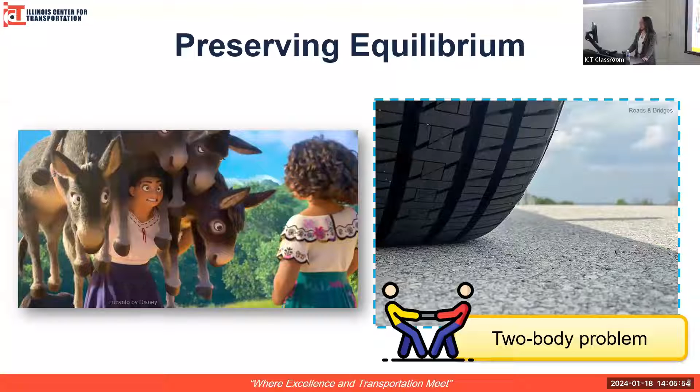The modeling framework, similar to when we train or even do equations, there's an input side, a black box of equations that you plug and chug, and then there's the output that you expect to learn more about going through that framework.

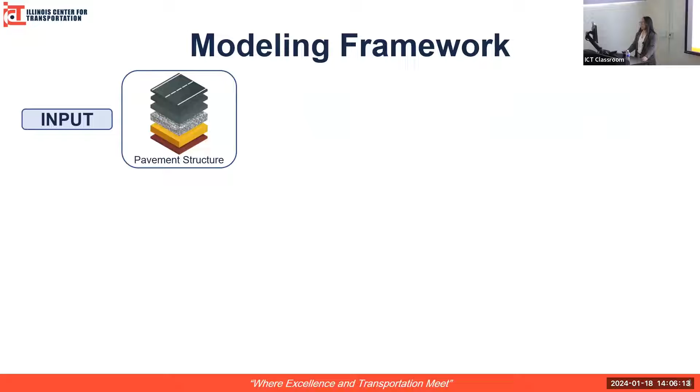In this two-body problem, the pavement structure, configuration, thicknesses, and composition is one of the inputs. The associated material properties for each layer matter because how that behaves depends on the material being subjected to, and how it's being impacted by the environment, whether it's a combination or singular individual contribution from temperature, or even inundation or flooding for moisture damage.

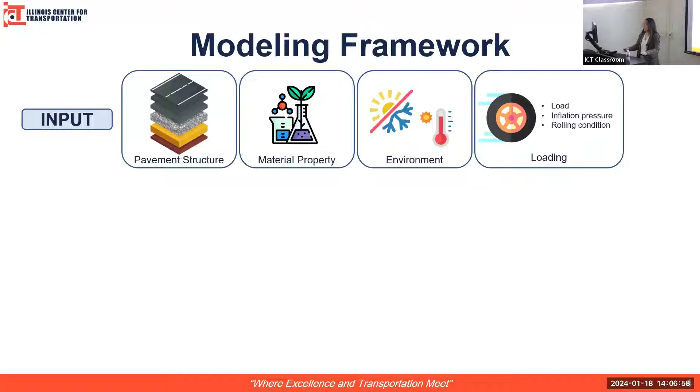And I cannot echo enough the loading itself, because the magnitude compared to the other components really drives this excitation. We can even further dissect this load, not only the tire load itself, the inflation pressure, and some of the rolling conditions, which later in the presentation we have some data sets to quantify how the loads change as a function of such metrics.

All of those inputs feed into our main tool, which we've used, and among other researchers who've also used other tools, our point of interest here is using the finite element method as our main means to identify how all this clustering of inputs into a loaded pavement problem helps us understand the behavior of pavement.

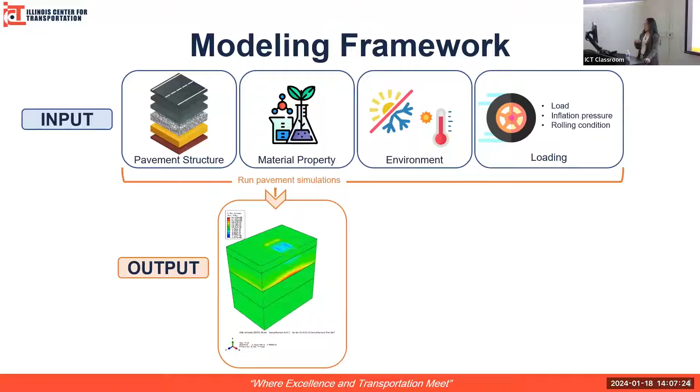And at the end of the day, why does that matter? It's because, as a pavement engineer or designer, we have to go back to the design that if you intended to withstand X amount of loadings, X amount of seasons, it should, because you know the inputs and what it's going to be subjected to. So we're relating it back to what's done practically, which is to anticipate when the pavement will fail over time, over a given number of loadings.

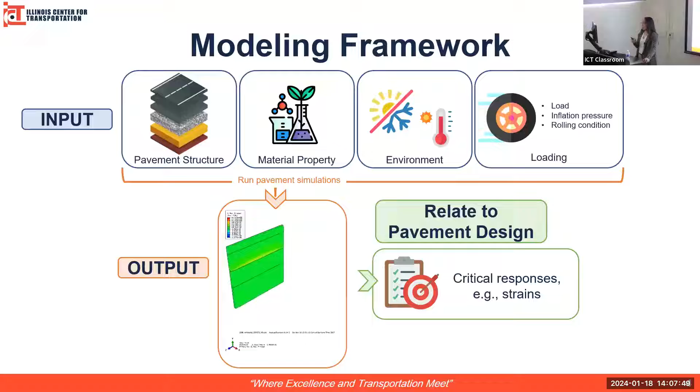I will do a quick sidebar, especially since this is a modeling theme for the semester, echoing this ongoing effort with the ASCE T&DI Highway Pavement Committee, led by Jaime Hernandez from Marquette University, among a list of really nice colleagues working on this, in collaboration with the EMI Engineering Mechanics Institute of Pavements Committee. I just really want to share this, for practitioners, researchers at any level, and for students.

The idea and definition of verification and validation - I really bring this up, though I won't go through the details. I just want to preface it, as we're embarking into modeling, it's very critical for us to understand the difference. Verification entails that your math, your algorithm is well represented by your code - you're verifying that the physics of those equations actually represent what is coded. Validation, on the other hand, is being able to confirm that after the code is verified, it can now represent reality. These two terms are usually interchanged, even in papers I have reviewed.

The importance is for all of us in this realm, whether it's pavement structure modeling or any type of modeling problem, to be on the same baseline so we can help each other make our models more credible and review each other's work with the same baseline ideas and terminologies that we should agree upon.

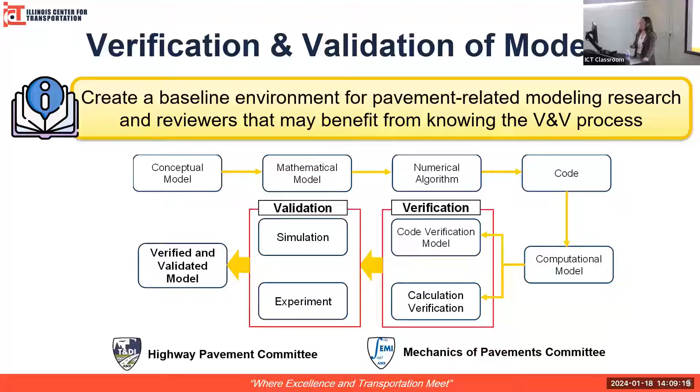Something to look forward to: the paper for this work, which we're offering to the community as a means, as the initial baseline, so that if you were to check or identify some of the topics I just mentioned, we'll be sharing it. Again, the idea as a group is not to tell you how to model, but in case you are intending to model, here are some of the critical steps and jargon or terminologies you should know, because there's a framework that has to be followed appropriately.

Another thing we emphasize, which you'll see in my later presentation, is being able to outwardly say what is the intent, what is the constraint of the model? Because at the end of the day, there's not a single model that can solve all problems - it's bounded by the build of the model. Being able to communicate that clearly to the community helps us make use of each other's models, because we know the limitations and the intended use of such a model.

We also offered some learning exercises, not only in asphalt pavements, but also concrete pavements and material modeling - this is past finite element modeling, which I'm presenting today. As I've said, this is just a baseline use of such a framework, which we are not creating. I think even the Department of Defense created this way back in the early or mid-70s. So this is nothing new, but it's something we've tailored for our needs in pavement engineering. Just a quick sidebar for that one.

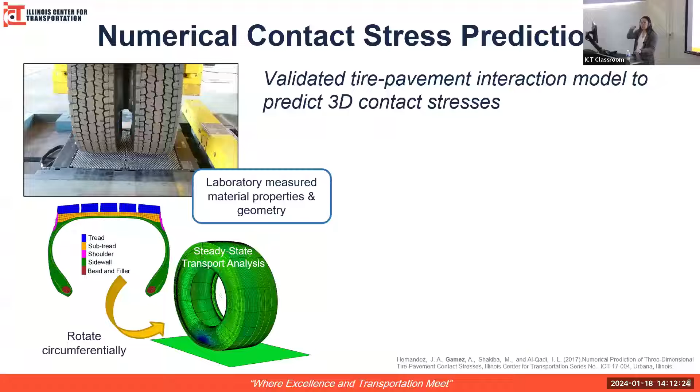As you can see here, the reasoning for that is for us to actually model the tire physically, and the layer differences that you're seeing in the cross section were actually modeled in the tire, including the reinforcements that go circumferentially. So what did we do?

We assumed that the tire is hyperelastic. And when I say elastic, I think we're fairly familiar with elastic, right? There's a stress and strain response. The hyper part comes into the fact that rubber lives in a large deformation domain. So it's just a little bit different characterization, but the same premise that we're staying at the elastic realm of once you release the load, there's no deformation, but just larger deformations.

We also included a numerical matrix varying not only the rolling condition, but also the speed, the applied load, and also the tire inflation pressure. For brevity and the extent of today's presentation, I couldn't include it all, but I'd be happy to talk. I also noted the report that details all the nice details of this work that was done earlier on.

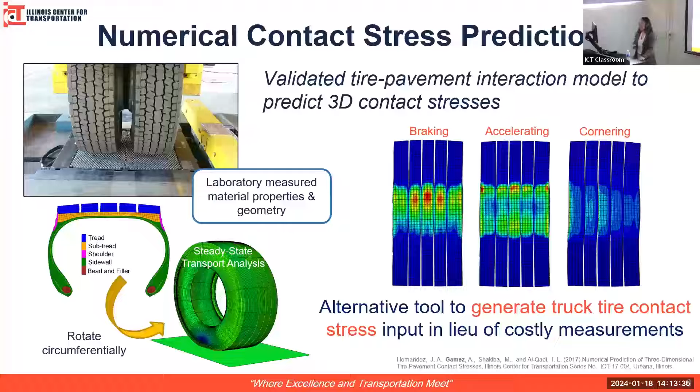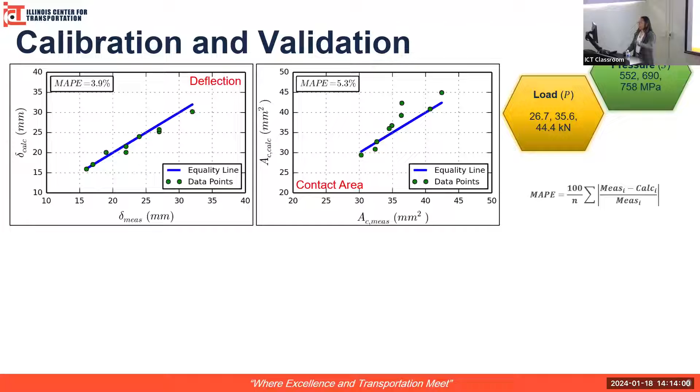I mentioned verification and validation and the importance of ensuring the accuracy of your model, because at the end of the day, garbage in, garbage out, without you properly bounding and creating that model appropriately. So just a quick check that we did perform calibration and validation of the model that I just showed of the tire pavement model, and the measured deflections and the contact area match quite well, 5% and under.

We also checked the maximum vertical contact stress. I have to note that, as I've said, the contact stresses were not measured directly because the pins would deflect, and what you're measuring is actually a voltage. So there are steps in between to even get to the contact stress.

One of the notions in having a relatively high, but still surrounding around the unity line for the measured versus calculated contact stress comparison, is that there's a variation of influence area for the pins. What I mean by that is the absolute contact between the measuring pin and the tire differs. When you're converting from the voltage all the way to contact stresses, it assumes a uniform influence area, which means the pin is always in contact.

Which is not necessarily true, as you can see here, where it varies—you can say 0% for this pin all the way to 100% in the middle of the tire. So that's where some of these inconsistencies may stem from, but the fact that they're hovering around the unity line gave us a green light that this is a fairly good model to move forward in predicting contact stresses.

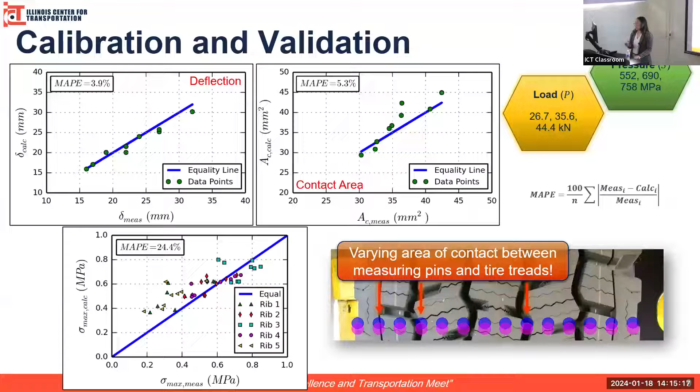Let's further complicate and make it more fun, because so far the model that we saw previously was just dealing with the mechanical deformation. I'll use my cursor in case we have people online. The mechanical deformation model was the one we did previously with the hyperelastic tire. But as we know, asphalt concrete, akin to rubber, is not only influenced by how fast you're loading, but also the temperature.

The notion was to examine what happens to the distribution of contact stresses in three dimensions, vertical, longitudinal, and transverse, when we compound this problem into a coupled thermal and mechanical interaction. To account for thermal exchange, we assumed boundary conditions: convection for anything exchanging temperature with a fluid or air, and conduction within the different components.

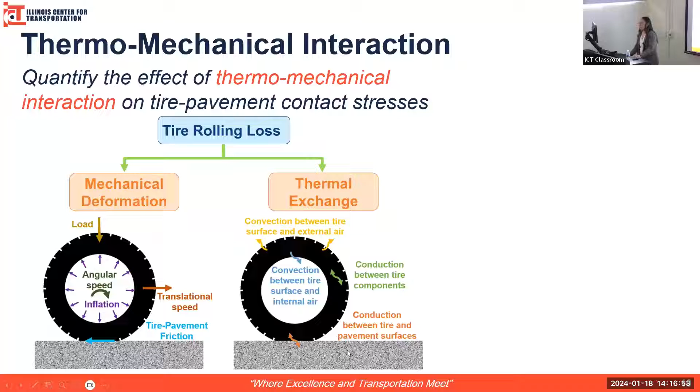If you remember, the cross-section of the tire had different components, so conduction happens within those components. As you travel after starting your car, the tire's internal temperature heats up. That operation temperature needs to be accounted for and how it influences the tire, plus conduction between the tire and pavement surface. Given the tire's steady state as it contacts the pavement, there's exchange happening, and both effects occur together in this coupling scenario.

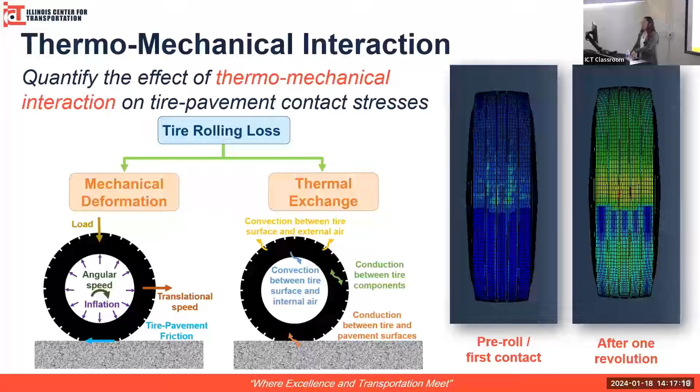So the first question was: does it matter? Here's a quick picture showing the answer is yes. The one on your left, the blue one, is a pre-roll, and after simply one revolution, there was a change in the tire behavior. So our first gate was that it seemed merited to keep following and study this thermomechanical coupling for tire-pavement interaction.

So we further checked with a sensitivity analysis. I want to comment that some of these combinations may not be realistic, but we wanted to see how sensitive the model is when parameters change.

In this first line of plots, from left to right we see the distribution of contact stresses for vertical, longitudinal, and transverse directions. This frequency representation shows, if you take all the contact stresses within an imprint corresponding to a value, how often they occur within the imprint. The spatial domain no longer matters here; we wanted to see how the distribution changes when temperature conditions change.

In this low temperature case, we maintain the road at -10, and the ambient low temperature at 0. We didn't establish a strict relation, we just selected crudely to see the model's behavior, and we changed the inner tire temperature from 10 to 65C—highly unrealistic, all the way to 65C. Usually the operating temperature normally lands around 35, but we wanted to see the difference.

In the temperature plot, we see the tire's temperature does change when subjected to these different boundary constraints, so the model is performing with respect to what it's being bounded by. The differences in the vertical distribution here are overlaid—not a big deal, likely because we're at really low temperature, so there's not much deformation happening in the tire to redistribute the load at varying contact stress levels. So what about closer to room temperature, 25C?

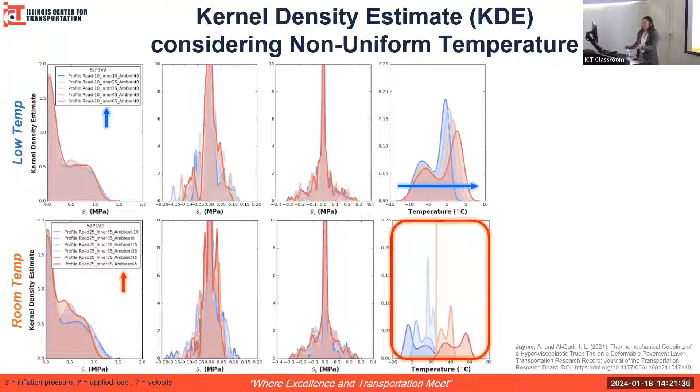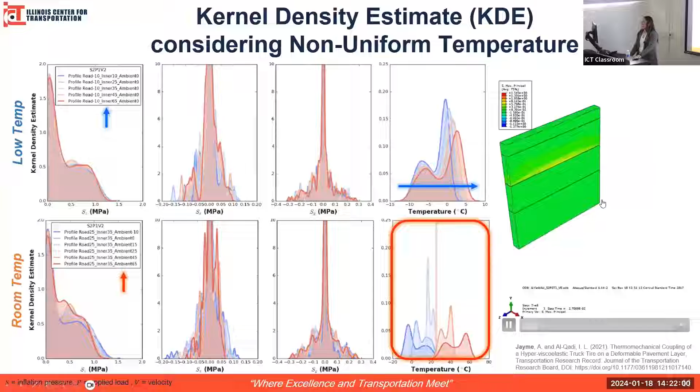This becomes important going back to the framework we saw earlier, loading it back to our pavement condition. This is a snapshot of how that contact stress driving the load excitation and response excitation will change the responses within our pavement model, which is a layered system. On top of that, I hope the video will play.

Just a side note, I saw this on YouTube. It does say it's for sleeping and relaxing. I don't use this myself to fall asleep watching a bunch of trucks travel over the road, but I thought it was kind of fun.

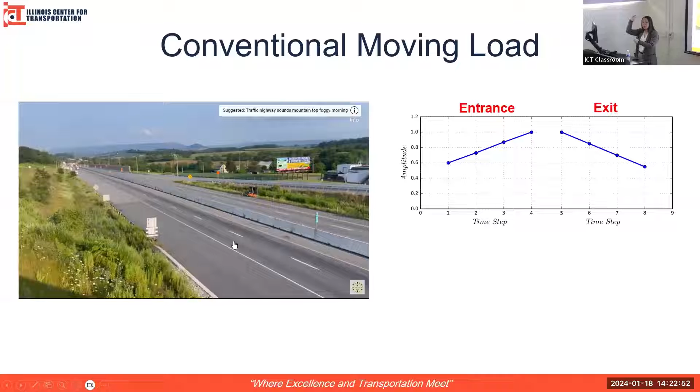I'm bringing this up because we've gone through some other factors, but we also have to account for traffic moving continuously. One way we've characterized that is to impose a smooth entrance and exit to the load. It's akin to holding yourself in place as your point of analysis: as the load comes closer, the response increases when it's right above you and decreases as it moves away. That's the reality we're incorporating into the model, to emulate this continuously moving load and better realize what's really happening in the field.

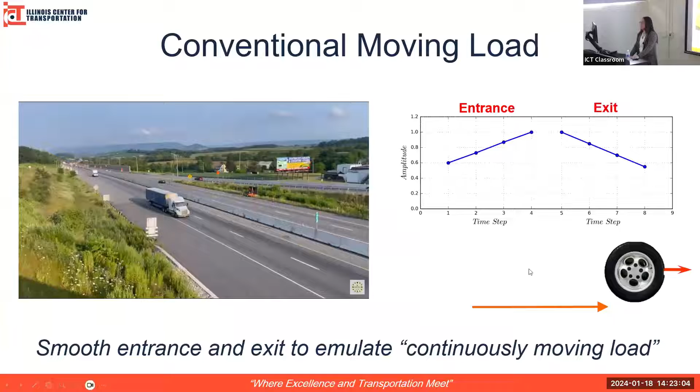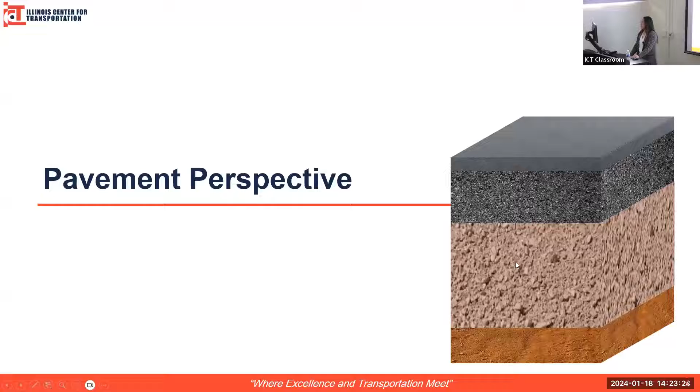So that's the first perspective—we've captured a tire model because our load excitation governs how the pavement should respond. Now let's take it from the other body of the two-body problem, the pavement perspective. Here's a quick example of a typical flexible pavement.

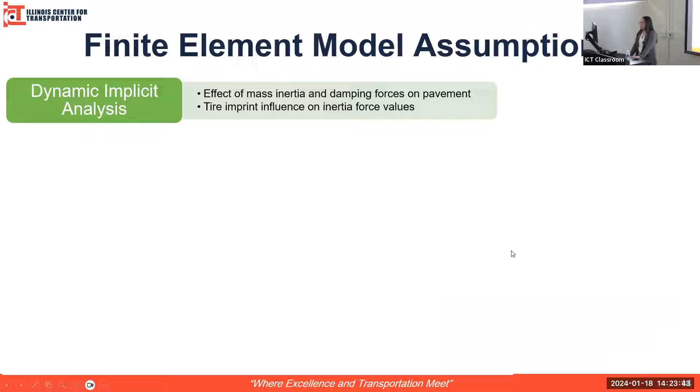So what are the assumptions? As I've mentioned in the verification and validation work, it's really critical for us to disclaim the assumptions related to the constraints of any model we build. In the FE model for the pavement, we perform a dynamic implicit analysis to account for inertia, and the material characterization from the layers we saw previously. We do account for linear viscoelasticity of asphalt concrete, as it's dependent on loading frequency and temperature.

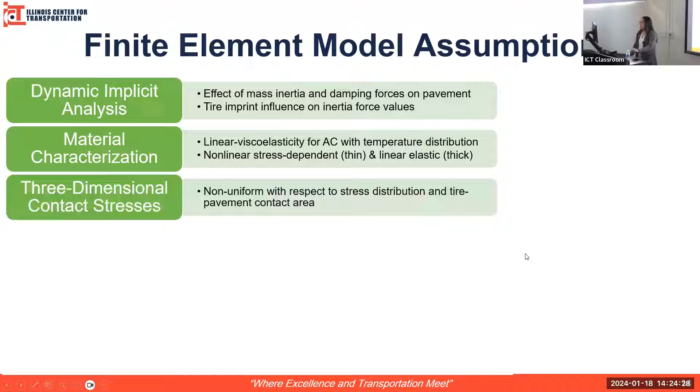I hope I've convinced you of the importance of three-dimensional contact stresses and the tool we have to get there from the previous slides, plus the continuous moving load implementation we do for the smooth entry and exit of the tire, to really emulate what's happening in reality. Numerically, that's just doing a smooth transition over the elements in a finite element model.

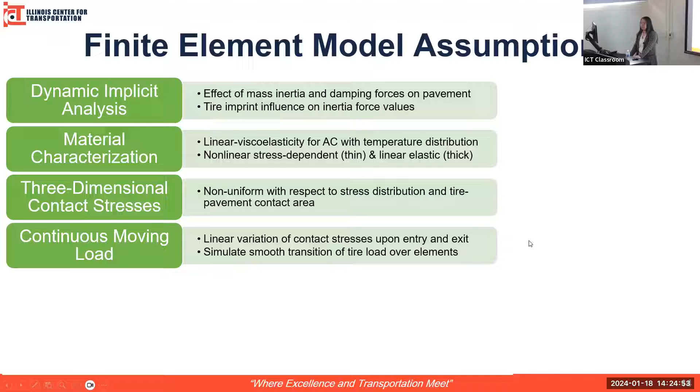We also want to point out boundary conditions—setting up your model not only for reality but to abate numerical errors. What I mean is I could inherently create a narrower model, but then we'd run into boundary condition issues. That's why we've elected to use infinite boundary elements to emulate far-field regions, similar to what we have out in the field, where far from the load of interest it should taper to zero, because it goes toward the core of the earth and there shouldn't be any loading felt that far.

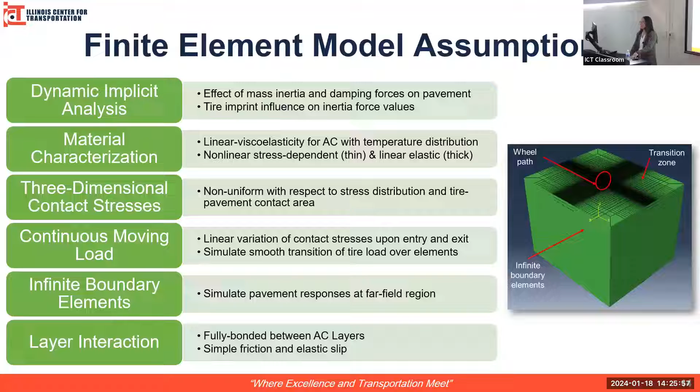Then also a last component is the layer interaction—the bonding if you have multiple AC layers, and also a friction condition whenever you have AC to granular, and granular to subgrade, and so forth. These are really the nice factors we've incorporated into the model with the intent to model reality as closely as possible. So the tool becomes very useful for us to understand pavements deep into any of the layers.

So I've mentioned the importance of pavement analysis, and I want to reel us back to what's done conventionally and what are some of the responses of interest when we do pavement analysis and evaluation.

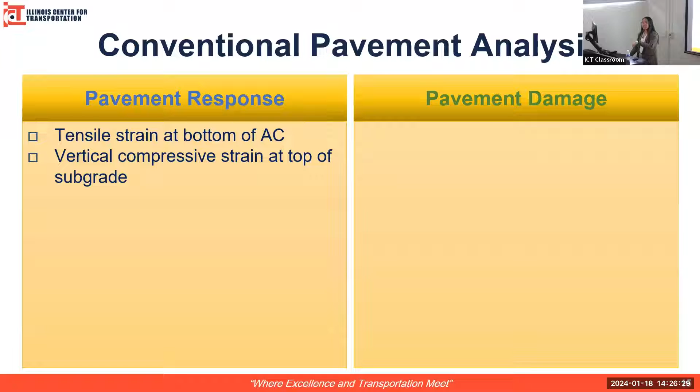Two of the critical ones, and maybe you remember this from statics or mechanics courses, is tensile strain at the bottom of the AC. When you have a beam, the tensile strain at the bottom of the beam becomes important. Similar premise for pavement responses. The vertical compressive strain on top of the subgrade tends to govern for rutting, and the tensile strain is with respect to fatigue cracking. Conventionally, these are done in the field and we call them transfer functions.

Maybe you've done MEPDG or similar pavement analysis schemes. The idea is from this single run of responses, a quick snapshot of how the responses result in terms of strains, we use transfer functions to predict all the way into failure with hundreds of thousands of repetitions over many decades of analysis.

However, one of the things this approach, although it's been very useful for our field, some of the drawbacks is we're really missing not only the three-dimensionality, but the fact that when you have pavement damage, it doesn't stem from a single point. It's because of the contribution of what's surrounding that point leading to that failure.

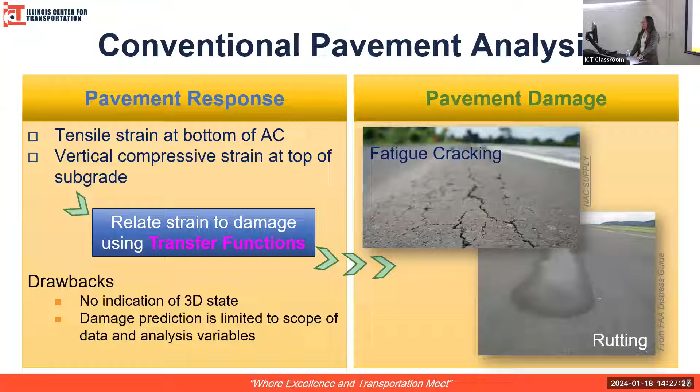And so we wanted to leverage the fact that we have a 3D model. We can calculate that bulk response. So the next question is how do we do that? One of the methods that ICT has come up with, we termed it the domain analysis method. Simply put, it's a means to tell you the bulk pavement response in 3D, not just relying on a single point response.

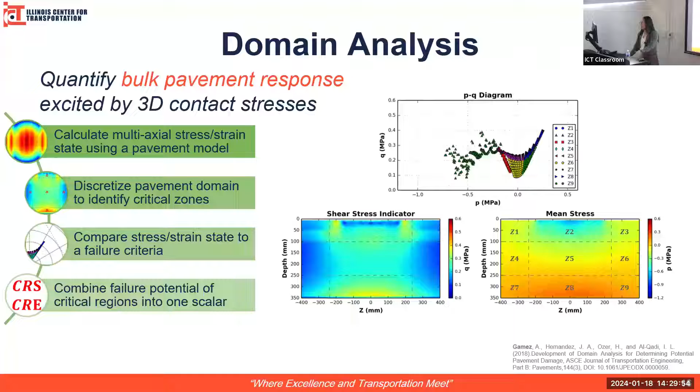So in an FHWA project, we compared for highway pavements NGWBT, new generation wide base tire, and DTA, dual tire assembly, the picture we saw of that half axle tire. The steer tire is the one that's put in the front of the cab, which in practice is one of the dual tire assemblies, so it's the same exact tire, just one.

So following the pavement critical responses, there's the single point, very direct response. 3-3 is along the transverse direction at the bottom of the AC. The transverse tensile strain on the surface, and 2-2 is your vertical strain within the top of the AC, the base, and the subgrade, and also shear, which is a vertical shear within the AC.

Before we dive into the next part, I want to point out the key difference: these are two different tire configurations, wide base tire and dual, but also the steer tire, since it's only one tire, is actually a little bit higher.

It's not just half of the dual. What we see is because there's a difference in the tire itself—the new generation is one wider tire compared to two narrower dual tires—there's a redistribution that leads to differences between the wide base and the dual, using the dual as the reference. For instance, the shear strain for a wide base tire could be 60 to 70% higher than the dual tire assembly, simply because of using that one tire.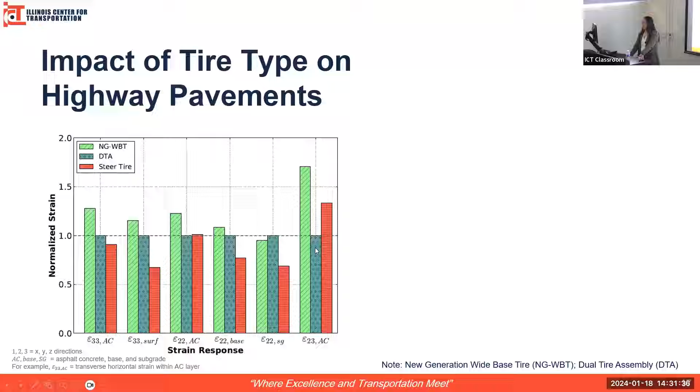The steer, on the other hand, also became higher than the dual because it has a higher load for a single tire than a single tire of the dual. So that's great, we're able to capture that.

Leveraging the domain analysis, we introduced two other zones combining half of zone 2 and zone 5. The idea is to capture, since it's non-uniform, the left and right side differences. In the domain analysis scalars, ACD1, the right-hand side green plot, for the wide base tire could be up to 70% greater in the bulk domain than the dual tire assembly, and some of that impact even deep into the subgrade could be 20%, which could be missed by lower responses. The steer shows a similar premise—because of that high load closer to the surface, we see an increase relative to the dual tire. Deeper into the pavement, governed by the load itself with a lower load, it's less than 1.

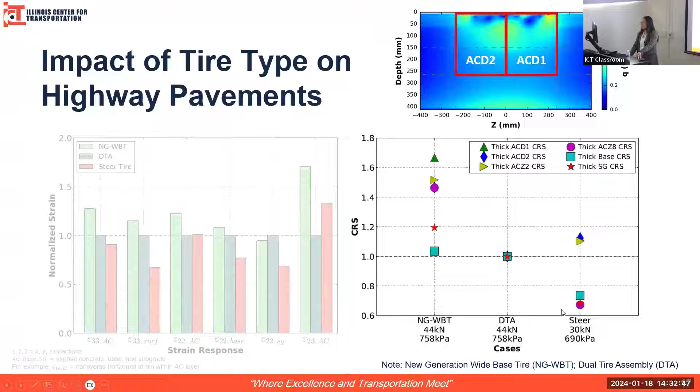Another conventional scenario in the field is having different inflation pressure for semi trucks. This happens because truckers or whoever's maintaining the semi find it hard to get to both tires, so usually one is underinflated or there's a difference in inflation. As you can see, following these critical responses—it's okay if we forget what these variables correspond to now—uniform versus differential inflation pressure scenarios no longer change between our critical responses. So inherently, that doesn't make sense in terms of whether a difference in loading conditions should anticipate a difference in response.

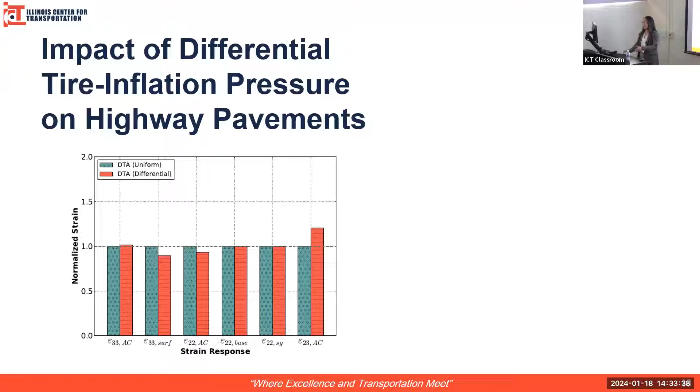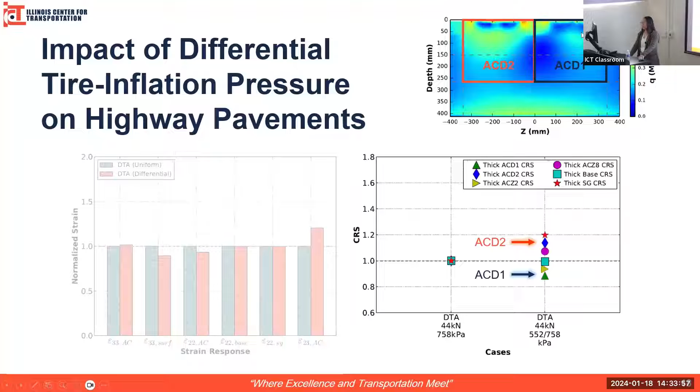Although closer to the surface in shear, there's a little bit of difference, maybe 15 to 20%. Remembering the left and right-hand side partitioning of zone 5, the domain analysis was able to capture the critical difference between the higher inflation tire and the lower inflation tire for a bulk response when you have different inflation pressures.

Turning to another premise in the talk, we've also done airfield pavement. So we saw highway, but now I want to turn attention to airfield pavements. Taking a step back, we're looking at contact stress data for a turning condition. Starting with the free rolling case, focusing on the pink with horizontal dashing, you can see it's symmetric—your longitudinal stresses, when added together, should be fairly symmetric because it's just moving in a straight line.

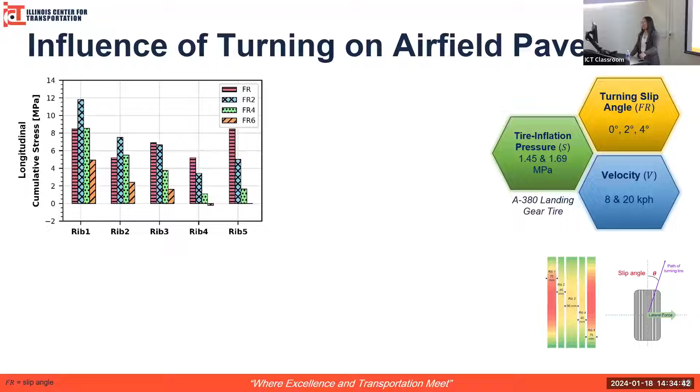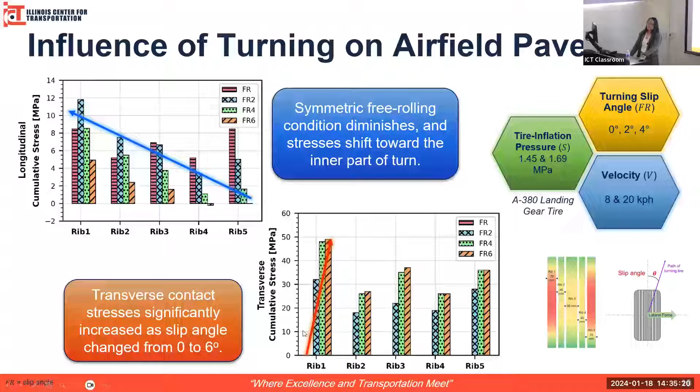However, when you start turning—even if you lean your body to one side like your left foot, especially if you're moving in circles—what we anticipate is that as you increase that turning propensity, symmetry starts breaking down. It's no longer symmetric because the problem is no longer symmetric. This is also realized in transverse contact stresses, as we increase the slip angle. For the A380, the aircraft we modeled, 6° is the recommended safe slip angle per Airbus condition. As you can see, because we're turning, the transverse contact stress also increases with that level of turning condition.

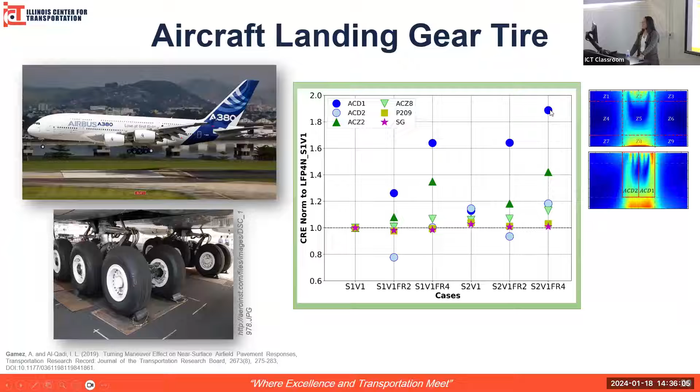Going back to the domain analysis we created, what does that mean for your ACD1 and ACD2 partitioning, the bottom of the AC Z8, and also the base and subgrade? Holding S1, the tire inflation pressure, and V1, a given velocity, in place, simply changing the level of turning from 0 to 2 degrees and 4 degrees, we see a significant increase in behavior, most dominant within the AC condition. Then when we increase the inflation pressure from S1 to S2, that increase is further exacerbated, all the way to 1.9 times greater than the reference condition.

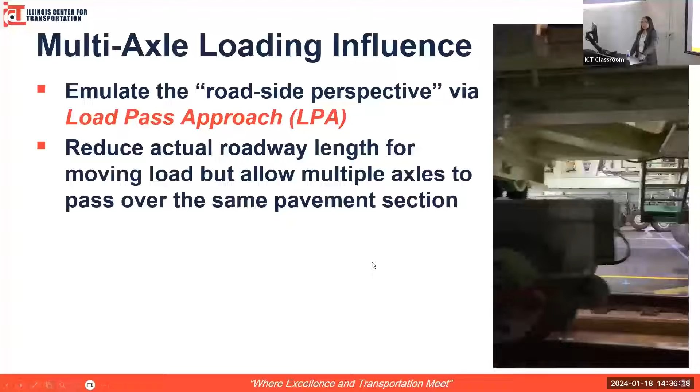To further add to that, one of the ongoing projects we have with FAA is utilizing their construction cycle for many data for flexible pavements. One of the things we ran into is some of the measurements we weren't able to utilize fully, so we borrowed our tools in numerical modeling.

We needed to understand a tridem or tandem condition, however the issue is it becomes very computationally expensive. The runs we've shown you in highway and airfield thus far are single tire simulations, which can take days depending on build, complexity, and partitioning. Imagine lengthening that for a tandem and tridem, where you have to physically represent the distance between axles, let alone the one laterally available for a full axle—that becomes very unfeasible.

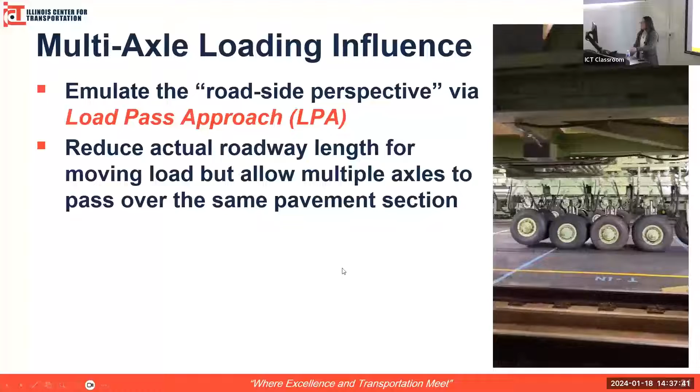So one of the things we recently established at ICT is the load pass approach. Let me explain with a video we took when we visited the FAA facility, where in our viewing window you see the entrance of a single tire, the tandem, and then the tridem. That's exactly what we did—we were able to reduce the roadway length in the model, similar to this viewing window.

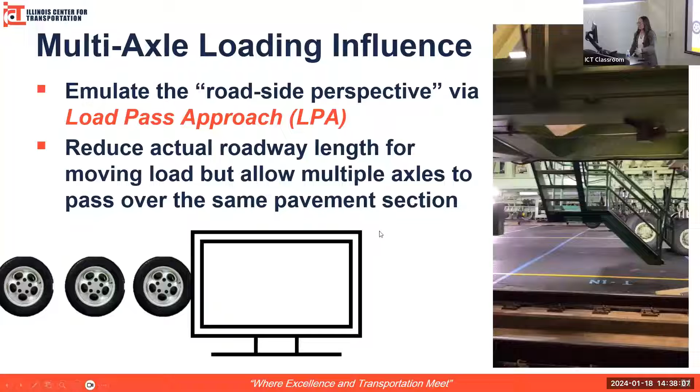The idea with the load pass approach is we manipulate the loading condition so the pavement can experience the tandem or tridem axle loading without needing to extend so many meters of pavement, which is unfeasible—we don't have time to wait weeks or months for a single simulation.

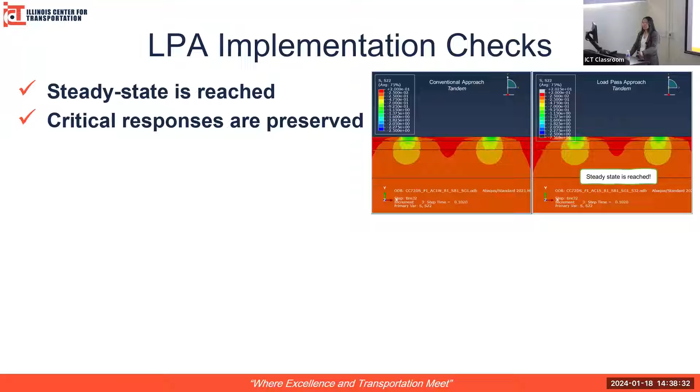Since our pavement model has conventionally been tried and true, with many validation applications like the Ohio section, Davis, Florida, and so forth, we had to make sure we weren't violating anything with this new load pass approach. Our checks indicated we reached steady states, and the responses are also preserved, which is great, so we can move forward.

In terms of the history closer to the surface, where you see this loading more predominantly, we captured the passage of the tridem. Then, more than a meter into an airfield pavement, you see the interaction between the axles, which is also nice with this new approach.

But what really drove us is significant time savings. I'll say the conventional approach is infeasible even using a supercomputer, just because of the extent of the model. With the load pass approach and that narrowed window, it reduced to about 5 days—granted this will vary a bit depending on the build we're considering.

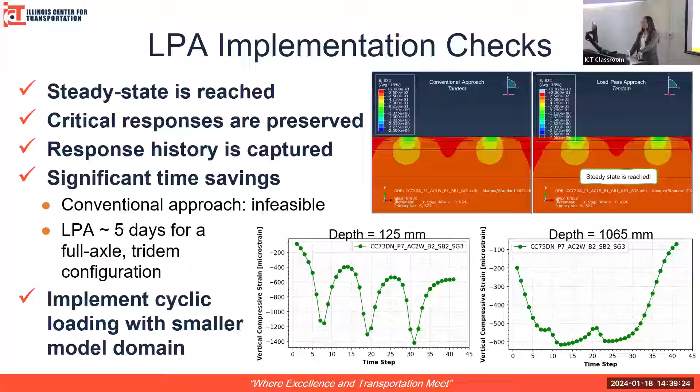One effort we're doing right now, as part of a regional UTC with CCAT, is implementing the load pass approach to hopefully combine it with rutting in terms of cyclic loading within a smaller model domain. So those are the two tire-pavement body interaction tools we have thus far.

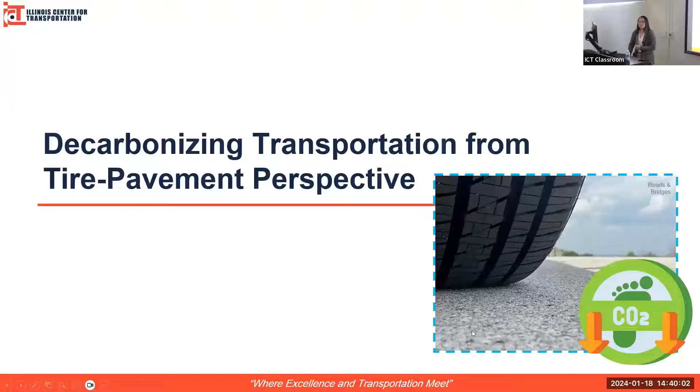In my last few slides, what I wanted to bring up—and maybe many of you attended TRB, if not this is in front of us now as transportation engineers—is how do we help battle climate change and decarbonize, as transportation is one of the main contributors. For me, what I can contribute is from the tire-pavement perspective.

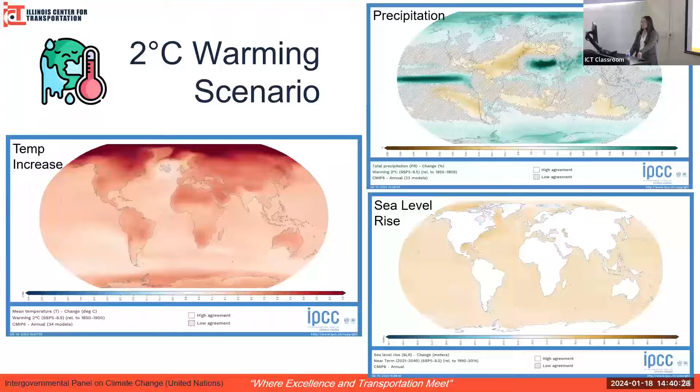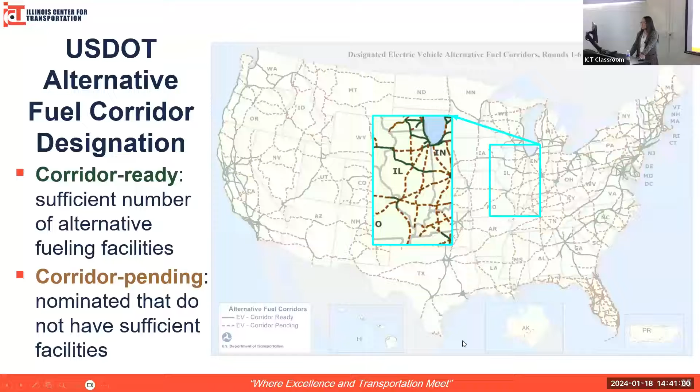One project we're doing right now at ICT, in collaboration with Marquette University, addresses the question: if we have heavy duty electric trucks that no longer need fuel or a combustion engine, but now we're replacing it with an electric engine and a battery, what about the placement of that battery?

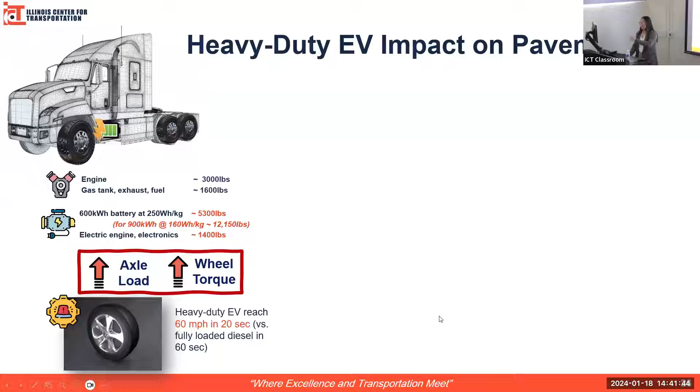Are our roadways enough to sustain that load difference? On top of that, because it's an electric vehicle, the access to acceleration is much faster than a combustion engine. So another question is, will shearing be worse? So the main question we're trying to answer is: do we have enough for the pavements to sustain this potential increase in load combined with high acceleration or deceleration? If so, by how much? And if not, what should we change?

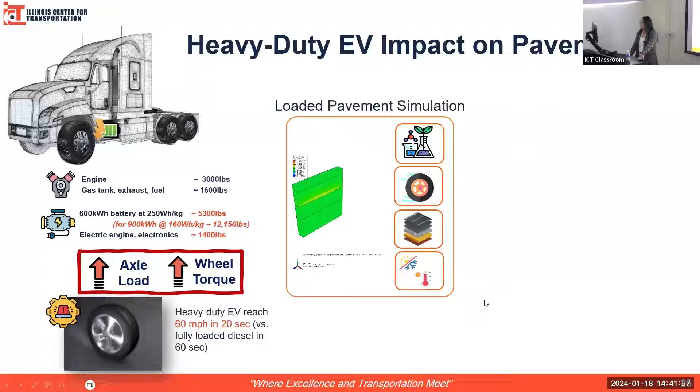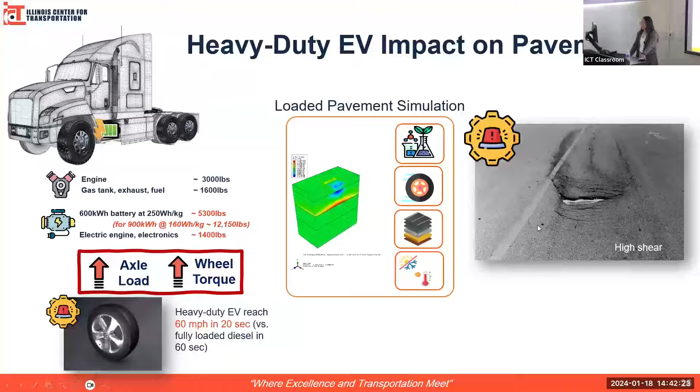So I will go back to our tried and true tool, our loaded pavement simulations, where we incorporate the materials and loading, but now we're changing the loading to heavy duty electric vehicle. We're considering typical sections here in Illinois, including composite pavements, since we have a lot of original concrete pavements that are now overlaid. That's also of interest, along with setting a temperature condition, and again answering whether it will sustain these new types of loading conditions we're subjecting our pavements to.

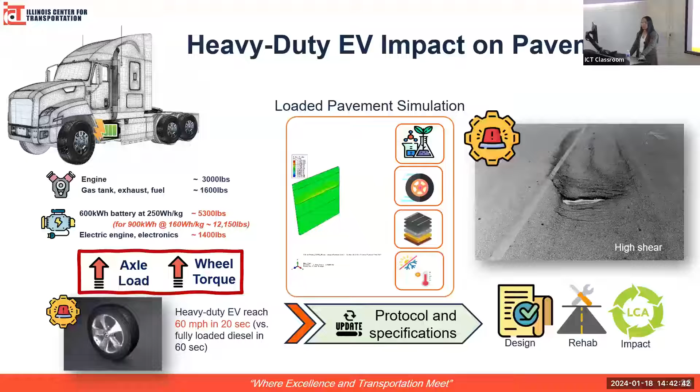Hopefully some of our findings may help identify potential thoughts on changes in design, maybe how rehabilitation over time needs to be done. We'll also be doing a life cycle assessment to identify the environmental impact as we delve into this topic. So today, I know that was a lot of information.

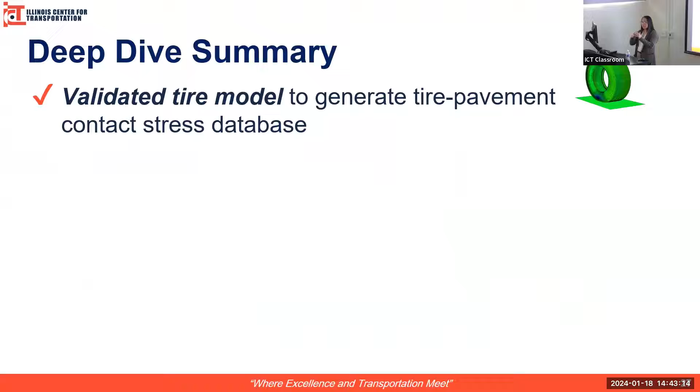I will not give any quiz, but hopefully in this brief deep dive into the tire pavement interaction realm, what did we see? One, we saw a validated tire model to generate contact stresses that incorporate rolling condition, braking, accelerating, cornering, applied load, inflation pressure, and velocity, and further compounded that with thermomechanical interaction when temperature is factored in.

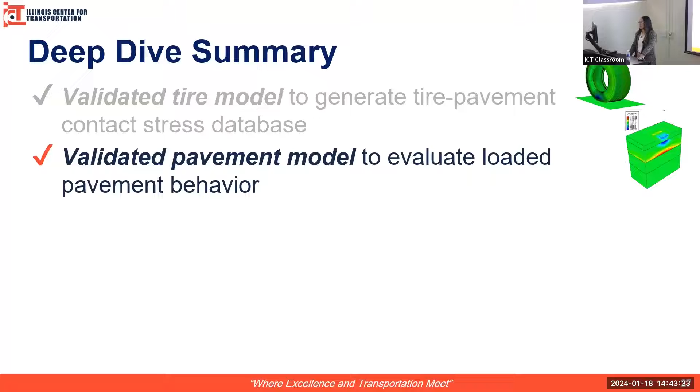We have a validated pavement model, so now we can use that contact stress input to excite our pavement responses along with environmental loading in terms of temperature. And we saw one of the means to identify or understand how pavement response behaves through domain analysis, leaving everyone, including myself, with the question of what we should be doing as we move forward in the near term toward decarbonizing.

The project I've mentioned is the heavy duty EV truck impact on pavements, but a personal interest of mine is compounding that impact with the impact of climate change on pavements, which is a really wide open arena for all of us to tackle. And with that, that's the end of my presentation.

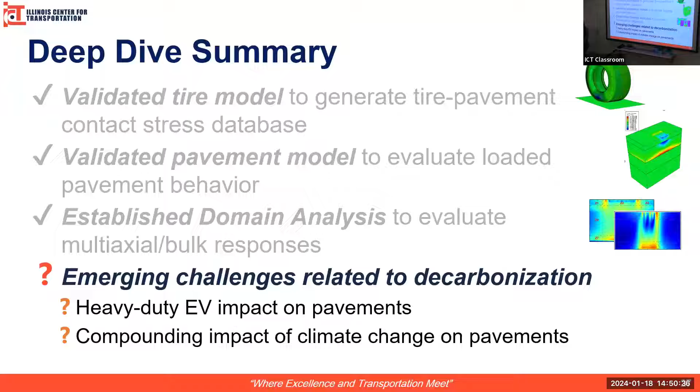Over the past six years you've done a lot of work getting a very accurate way of determining stresses on pavement through the tire and so on. How do you see this integrating with, let's say, any contractor or consultant who wants to design a section in Illinois? The barrier for entry is extremely high with all the equipment you're using, so how do you see this finding a way into the mainstream market when it comes to pavement design? That's a great point. In some of the efforts we've done in the FHWA, one thing we account for is wide base tire, since most of the design premise is a dual tire assembly, which is conventional. In that work we've offered an adjustment factor. But I think what you're leading into is, agencies are our main customers, we serve the public, and I can't just say buy a finite element tool and put in these inputs, that's not really feasible or appropriate. One thing that I'm not an expert in, but our ICT group has been moving forward with, is tying the power of data with finite element. In recent work with the FAA on that TRIDEM configuration, we provided three-dimensional responses to a physics-informed neural network to handle the data well and predict within the domain of metrics we have in the simulation. One intent is, can we embed such a neural network in a design process? Or another approach is maybe having a more simplified approach, narrowing it down to a plug and chug equation, to utilize this nice data without needing the expense of finite element or even neural network methods.